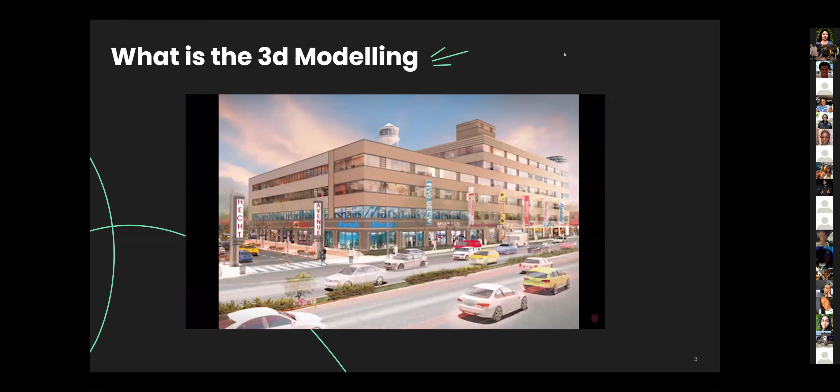My name is James Knoll, and I'm a highway engineer at Dewberry's Mount Laurel office. 3D modeling is a technique in computer graphics for producing three-dimensional representations of objects or surfaces. In recent years, 3D modeling has become widely used in a large variety of industries and mediums. An artist may use special software to develop a three-dimensional representation of scenery or characters for use in illustrations, video games, or movies, while an engineer or architect may use similar software to create 3D models of their projects and design.

Prior to the advent of computers, engineering designs had been drafted by hand. But as technology evolved, computer software became a common engineering tool. Currently, designs and plans are drafted using computer-aided design software, and the visuals created are generally in 2 dimensions. Since the engineering design process is very iterative, whenever a change to the design is made, the visual generally needs to be changed as well.

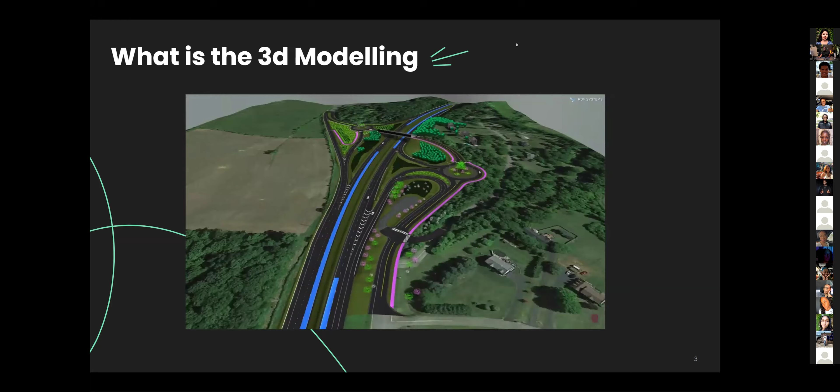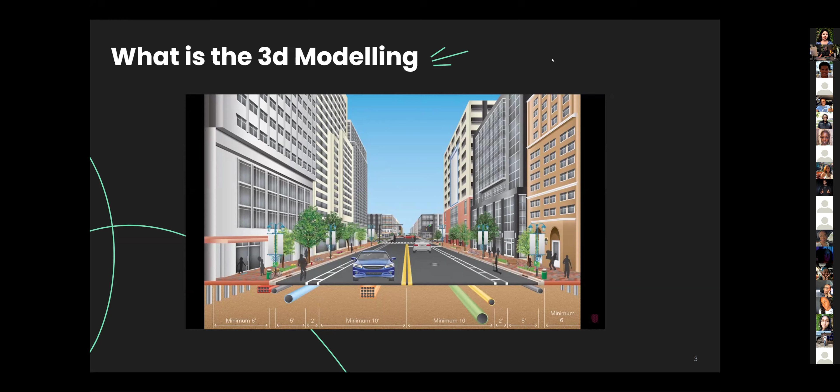By using 3D modeling, it is possible to more easily see how the changes in one area of the design may affect the overall design. For example, a 3D model of a pipe network may reveal that several pipes in the network are colliding with each other, or that the pipes might be colliding with other design elements. For a highway engineer, a model of a roadway may show that raising the profile in one area may cause drainage issues down the road.

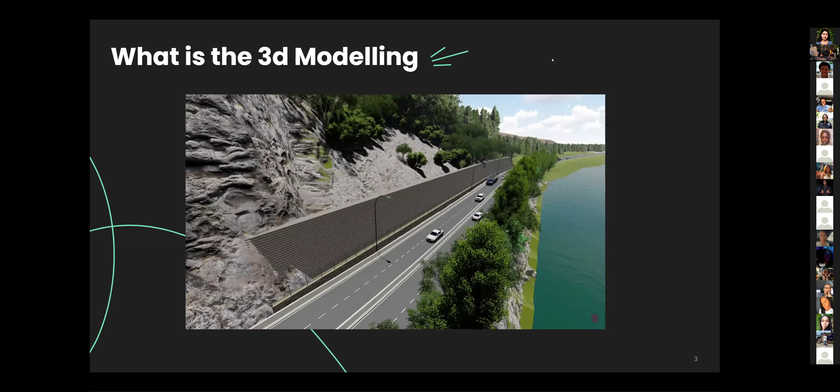While it may be possible to spot many of these issues with a two-dimensional representation, depending on the complexity of the design, it will likely be difficult and time-consuming. But with 3D models, it is easier to locate these issues and determine how to correct them. Overall, 3D modeling allows engineers to develop a better understanding of what their designs will look like once constructed, thus making it an invaluable tool for developing more accurate and constructible designs.

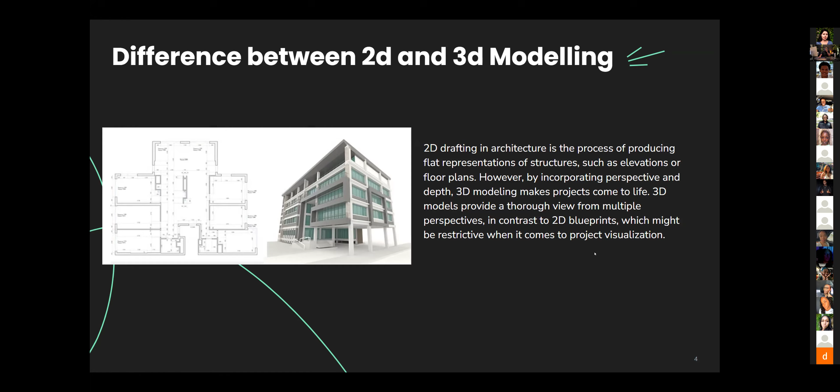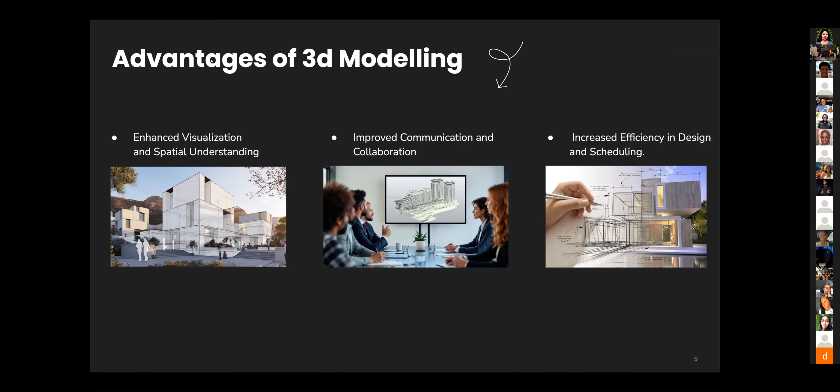So some advantages of 3D modeling include enhanced visualization and spatial understanding, improved communication and collaboration, and increased efficiency in design and scheduling. On the other hand, the disadvantages of 3D modeling include the high initial costs for the software and the powerful hardware. There's a steep learning curve required, so there's significant time and training put into it. It's also a time intensive process for creating detailed models.

The types of 3D modeling techniques include building information modeling, known as BIM, wireframe modeling, primitive modeling, parametric modeling, point cloud modeling, and spline modeling.

Okay, building information modeling, BIM, is a cutting-edge technology that is helpful for architectural visualization in both management and construction. It also makes it feasible to build intelligent models and calculate the quantity of materials required, the building time, and the total cost of the project. This technology aids in iterative design to create more environmentally friendly structures and make efficient use of all available spaces. It occurs in a cloud-based setting and is quite cooperative, allowing construction crews to stay up to date on the latest developments. Some 3D softwares that use BIM are Autodesk Revit, SketchUp, and ArchiCAD.

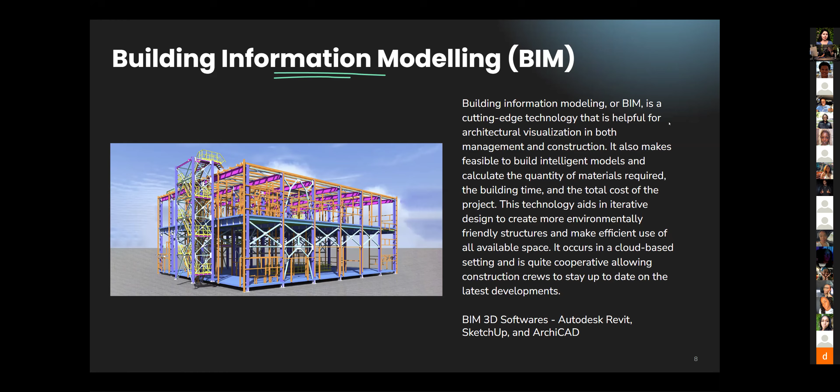So the pros, I would say, for the BIM modeling technique is that there is improved visualization. This provides realistic 3D models that help the stakeholders understand the project better in comparison to the 2D drawings. There's also enhanced collaboration. The centralized model allows architects, engineers, and contractors to communicate with the clients on the same platform, reducing miscommunication. Clash detection identifies design conflicts, for example, pipes running through beams, early, saving costly rework during the construction.

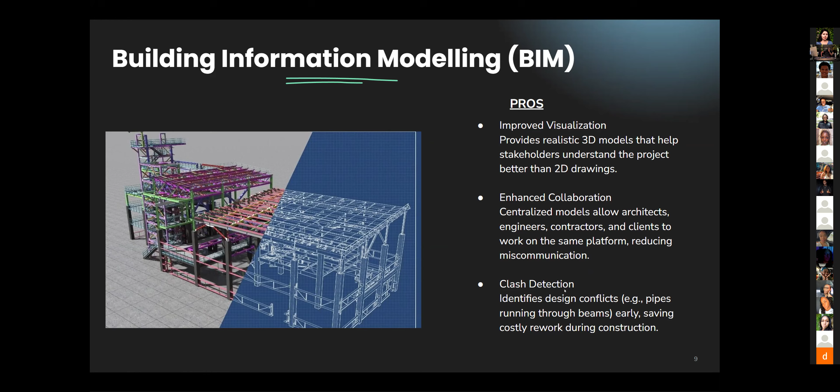The cons include a high initial cost for the software license, the training, and the hardware upgrades. They all can be expensive. There's a steep learning curve. It requires significant training and experience to use effectively. And the standardization problems: different organizations or countries may use different BIM standards, creating somewhat of an interoperability issue. Yeah.

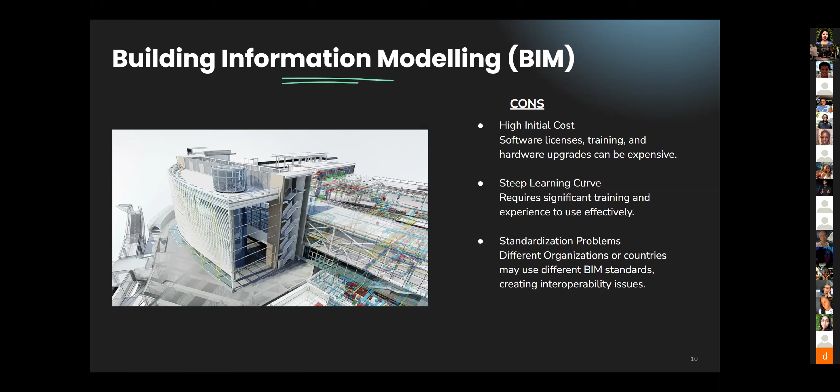Wireframe modeling. Wireframe modeling is also referred to as edge modeling. It entails the creation of a skeletal depiction of an abstract edge of the real-world item. It is a basic and one of the quickest ways of creating 3D visuals. With wireframe modeling, a designer uses lines, circles, and other shapes to build a geometric representation of an object. These lines provide a clear and precise definition of objects' points. This type of modeling might be compared to a preliminary design plan or rough drawing. Wireframe softwares include Miro board used in class, Adobe XD, and Figma.

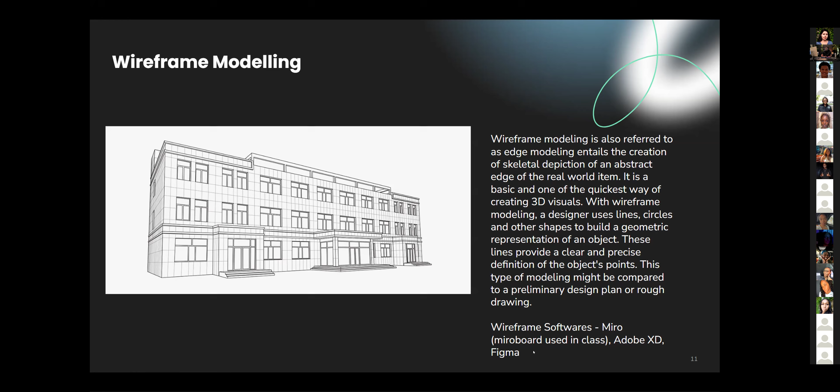Some pros of wireframe modeling include simplicity and speed. Wireframes are lightweight and quick to create, making them ideal for initial concept development. Another pro is low computational load. Because only edges and vertices are shown, the wireframe requires less processing power than surface or solid models. It's a clear visualization. They provide clear understanding of the underlying geometry and proportions of the design.

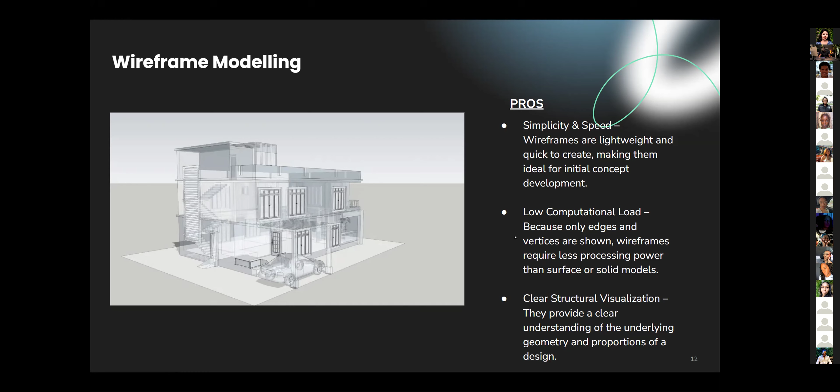The cons of wireframe modeling. Sometimes there's a lack of realism. The wireframes do not represent textures, materials, or lighting, making them less useful for presentation or realistic visualization. Ambiguity in complex models. As you can see on the image, the overlapping lines and edges can make complex wireframes confusing and hard to interpret. No mass or volume information. They don't provide data on weight, density, or material behavior, which limits engineering analysis.

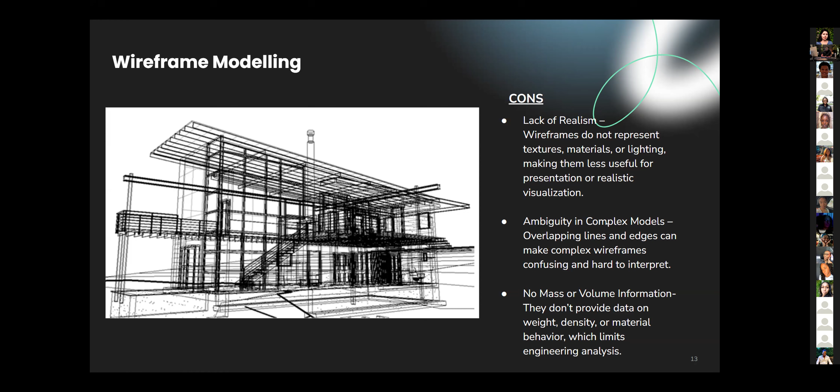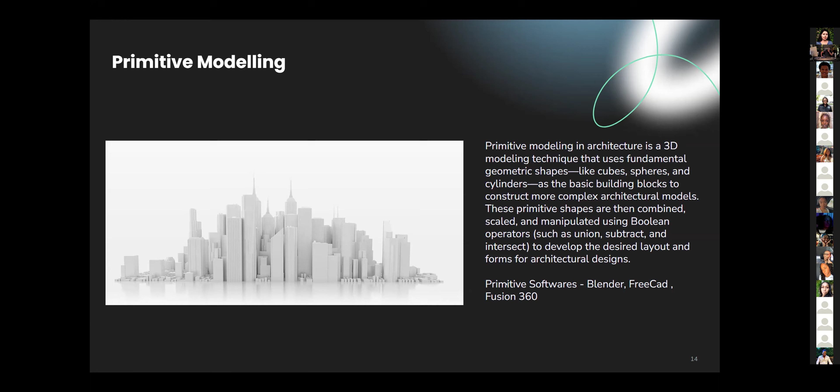Primitive modeling. Primitive modeling in architecture is a 3D modeling technique that uses fundamental geometric shapes like cubes, spheres, and cylinders as the basic building blocks to construct more complex architectural models. These primitive shapes are often combined, scaled, and manipulated by Boolean operators such as union, subtract, and intersect to develop a desired layout and forms for architectural design. Some primitive softwares include Blender, FreeCAD, Fusion 360.

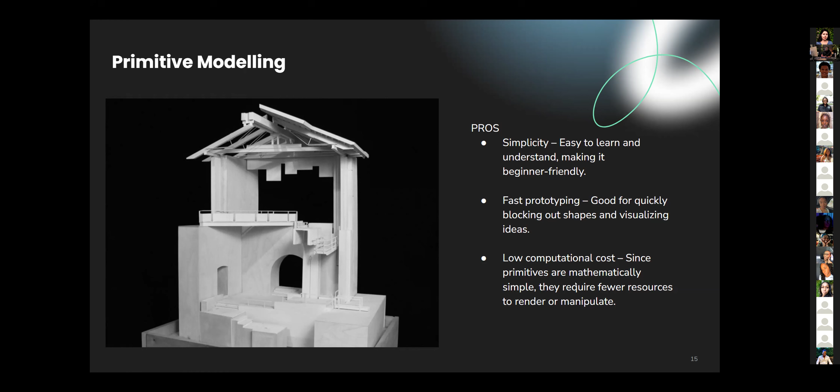The pros of primitive modeling include simplicity. It's easy to learn and understand, making it beginner friendly. It's fast prototyping, good for quickly blocking out shapes and visualizing ideas. It has a low computational cost. Since the primitives are mathematically simple, they require fewer resources to render or manipulate.

Some cons include the limited detail. It cannot capture complex organic or irregular shapes effectively. There can be some unrealistic results, so the models can look a bit blocky or unnatural if not further refined. It's also time consuming for the refinement. To reach realism, primitive models often need to be heavily modified or combined with other techniques.

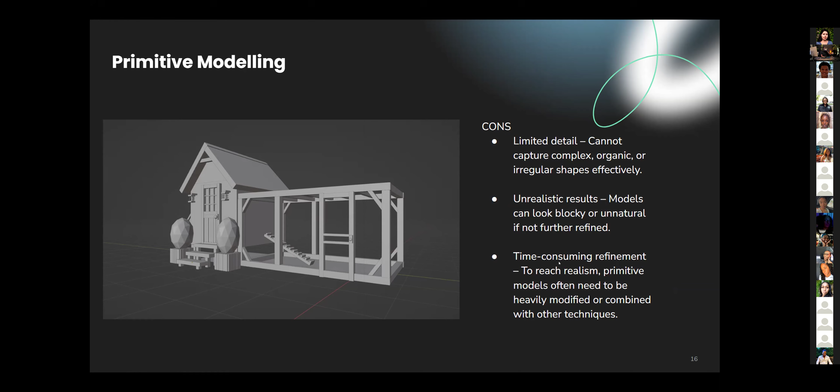Parametric modeling. Parametric 3D modeling enables unrivaled precision when refining a production design. Yet, it is a lengthy procedure. By simply adding a set of parameters, an editing model may be created. Since it demands incredibly precise measurements, it cannot be incorporated in early stages of a project, therefore frequently works well in conjunction with direct modeling. Adding new parameters allows for the creation or modification of objects. Therefore, any modification has potential to impact the overall design. This modeling technique highlights that creative solutions can be created.

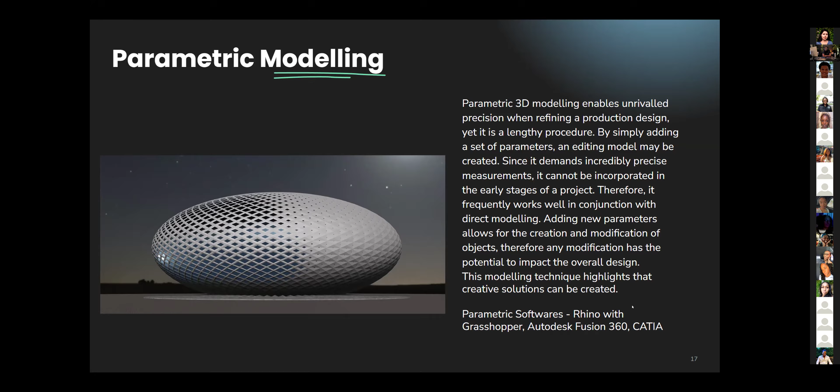Parametric softwares include Rhino with Grasshopper, Autodesk Fusion 360, and CATIA. Yeah. Some pros of parametric modeling include design flexibility and control. Parameters, such as the dimensions, constraints, relationships, can be adjusted at any time, and the model updates automatically, making it easy to explore design variations without starting over.

Efficiency in iteration. It saves time when changes are required, especially in projects with multiple parts or assemblies that depend on each other. Accuracy and consistency. Relationships, for example, if you say this hole stays centered on the face, ensure that the design intent is preserved even when the dimensions change.

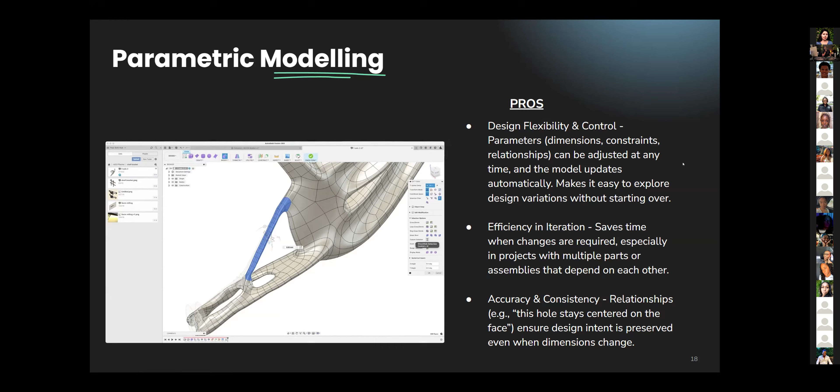Some cons include the steep learning curve. Parametric modeling requires strong knowledge of parameters, constraints, and software tools, which can be intimidating for beginners. And there's also high computational demand. Complex parametric models can become heavy, slowing down processing and requiring powerful hardware. Over-constraint or model breakage. Poorly planned parameter relationships can cause errors or make the model unstable when the dimensions change.

All right, guys, keep it going. Okay, you have like 5 minutes in your time.

Point cloud modeling. Point cloud modeling, occasionally referred to as scan to BIM, is a 3D computer graphics and modeling technique in which a sizable collection of points in three-dimensional space is utilized to depict the environment or structure. Usually, a variety of scanning technologies like photogrammetry or LiDAR, light detection and ranging, are used to record these points. In point cloud modeling, every point in the data set has information about where it is in 3 dimensions, along with maybe other characteristics like color or intensity. A thorough and precise 3D representation of the scanned object or environment can be constructed by processing and evaluating these points. Softwares that use point cloud are Undet, CloudCompare, and MeshLab.

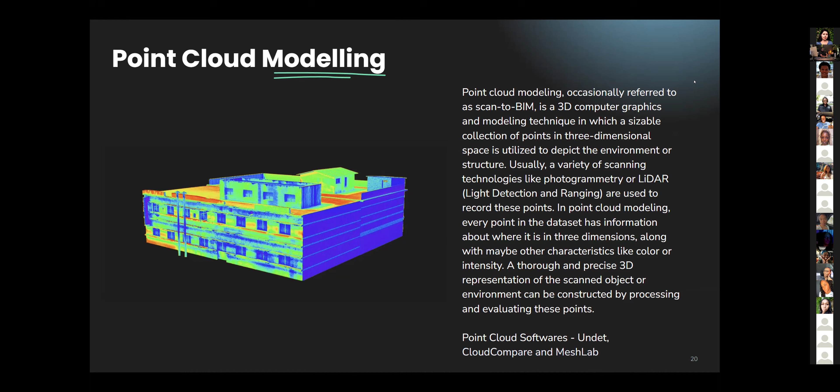Okay, so the pros of point cloud modeling are high accuracy and detail. It captures exact dimensions and shapes of real-world objects, even with complex geometries. Laser scanning or photogrammetry ensures millimeter-level precision. Speed in data collection. Scanning a site or object is much faster than manual measurement or traditional survey methods. Comprehensive documentation. It provides a complete digital record of existing conditions useful for restoration, renovation, and maintenance.

Cons of point cloud modeling are a large data size and processing needs. Point cloud files are massive, requiring high computing power, storage, and specialized software. Processing into usable 3D or BIM models can be time intensive.

High cost on equipment and software. Laser scanners, drones, and photogrammetry tools are expensive. Professional software licenses add to project cost. Complexity of data handling: it requires skilled personnel to clean, register, and interpret point clouds. Raw scans often include noise and need refinement.

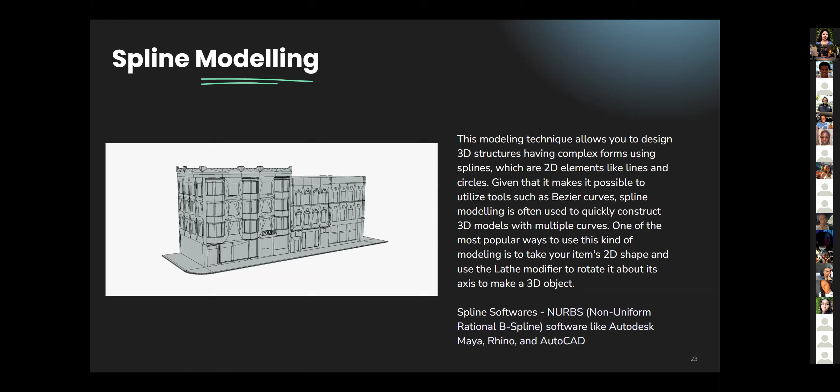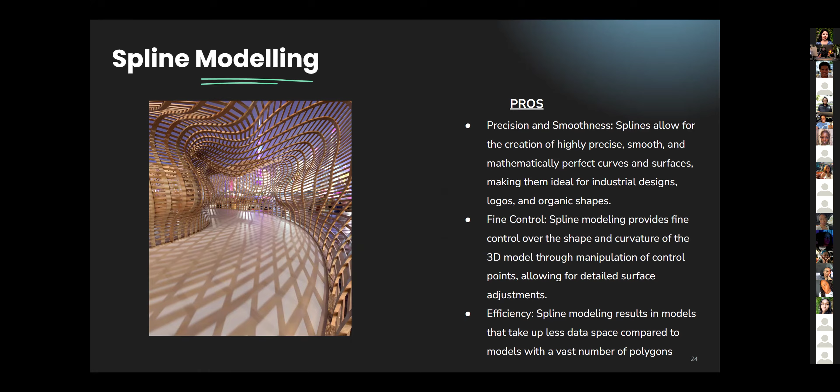So some pros are precision and smoothness. Splines allow for the creation of highly precise, smooth, and mathematically perfect curves and surfaces, making them ideal for industrial designs, logos, and organic shapes. Fine control: this modeling provides fine control over the shape and curvature of the 3D model through manipulation of control points, allowing for detailed surface adjustments. Efficiency: this modeling results in models that take up less data space compared to models with a vast number of polygons.

Okay, and some cons are complexity for detailing. It can be challenging to edit and detail individual parts of spline-based models as its structure is more continuous. Limitations with engines: game engines and other applications are often better adapted to polygonal models, which can pose compatibility challenges for spline-based designs. High base mesh weight: while splines offer fine control, they can result in higher base weight for the mesh, impacting performance in some contexts.

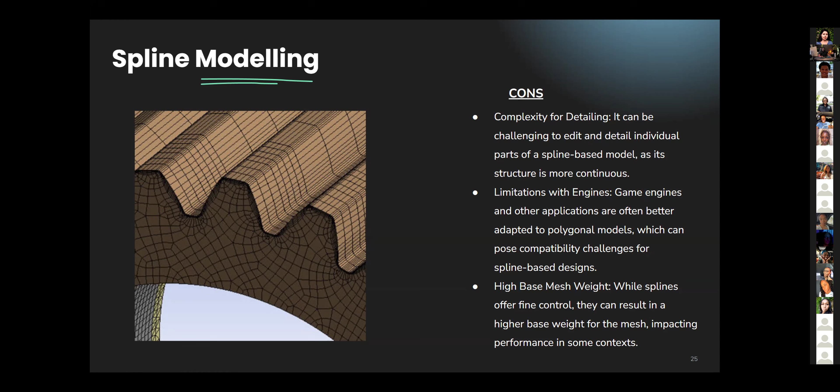So, 3D modeling techniques in architecture. In architecture, 3D modeling techniques are methods used to digitally represent buildings, landscapes, and structural elements in three dimensions. These techniques help architects and designers visualize, analyze, and communicate their ideas before actual construction. The choice of technique depends on the project's requirements, the software being used, and the level of detail needed.

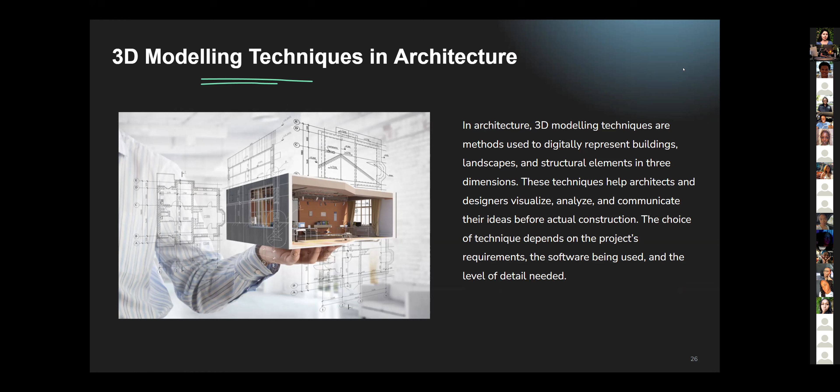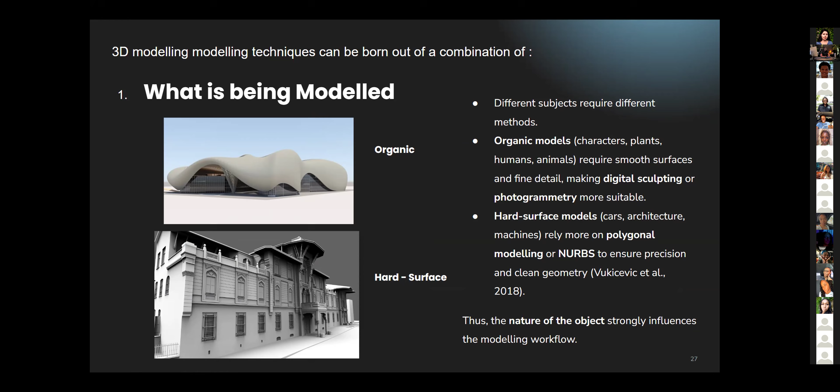Okay, so essentially, just to wrap this up, this explains the different types of modeling techniques. So you have organic and hard surface, and this shows why different subjects require different methods. You can skim through. Okay, next. So it also is dependent on the 3D software or tool being used. Each software has its strengths that shape techniques.

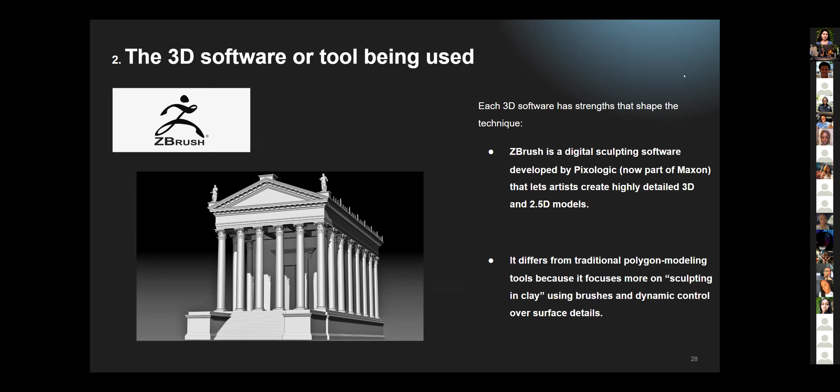This is an example of ZBrush. It's a digital sculpting software, and it differs from traditional polygonal modeling tools because it focuses more on sculpting in clay using brushes and dynamic control over surface details. Similarly with Rhino, it has conceptual design, refinement, parametric design, and exports for production. These are different things that you consider.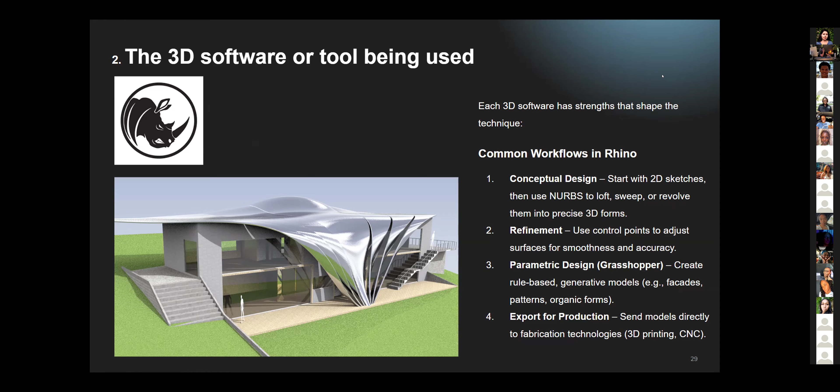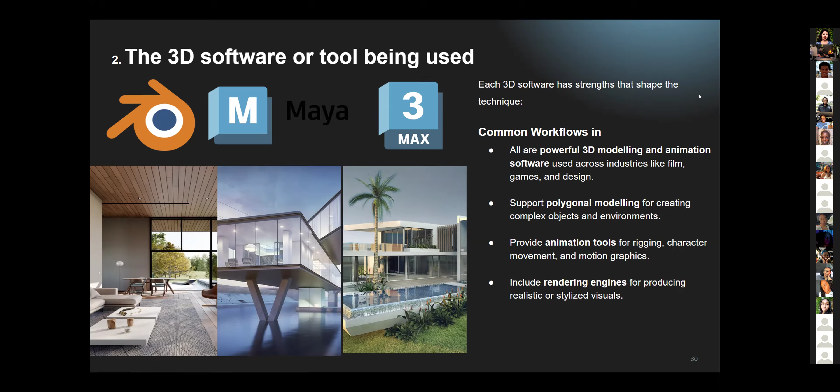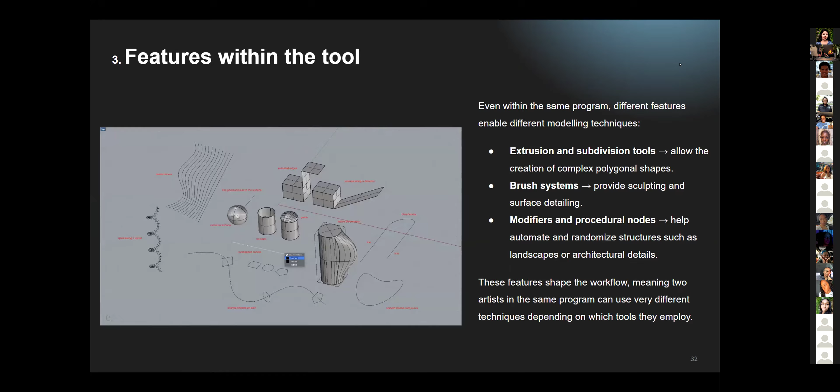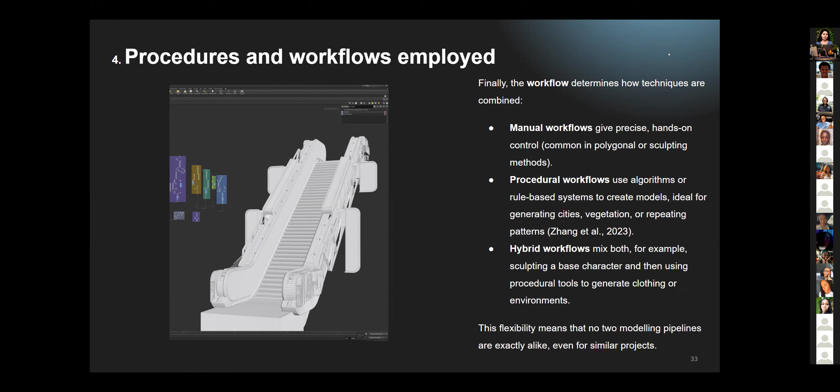And finally, the workflow determines how techniques are combined. You have manual workflows, which give precise hands-on control; procedural workflows that use algorithms or rule-based systems to create models, generating cities, etc.; and hybrid workflows that mix both, for example, sculpting a base character, then using procedural tools to generate clothing or environments. The flexibility means that no two models... oh, thank you.

All right, topic one. Thank you. I'm going to save my comments. So after you present, I will comment, and then you ask the question, and then the other group members can ask questions. Okay, good, you have references. There are some things that I might have to update or correct in the presentation before you ask the questions, right? All right. So that's topic one, which was: what are the types of 3D modeling techniques and their applications in architecture?

Topic two, advantages and disadvantages of real-time versus offline rendering. Sir, it's two now. Yeah, two now. Alright, presenting first, and then we're asking. All right? 15 to 20 minutes. All right?

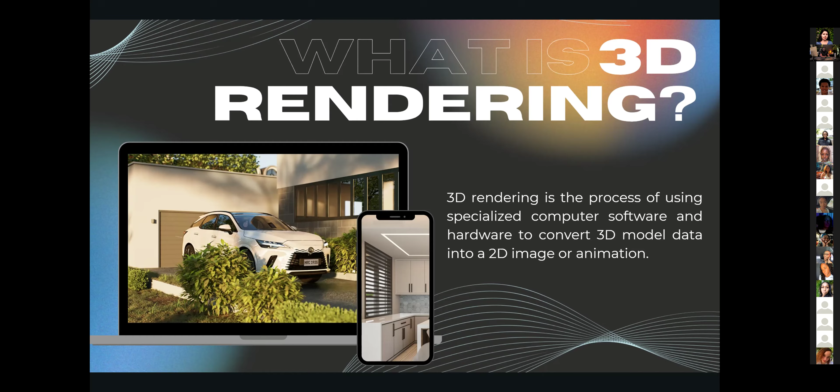Okay, the big question, what is 3D rendering? So 3D rendering is the process of using specialized computer software and hardware to convert 3D model data into a 2D image or animation. So basically, just think of it like taking a digital model and giving it a realistic look. It's almost like taking a picture of something that doesn't exist yet. And I think all of us are quite familiar with all of that.

So one of the coolest parts about this is that you spot mistakes before construction. It's basically a cheaper way to fix something in rendering than when the building is halfway done. And since architects often work with engineers, interior designers and landscapers, renders help everyone to get on the same page visually.

So as it relates to architectural firms now, most architectural firms use both real-time and offline rendering softwares based on the different scenarios. Firms use real-time rendering for quick changes for client previews and offline rendering for the final output or marketing. So just by that alone, you kind of have an idea of where the softwares, both real-time and offline, work, or what we would expect then.

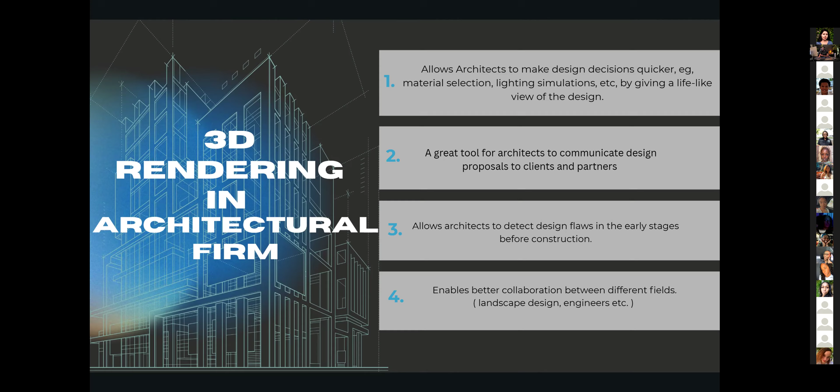So for this, we could say that it's not just about making pretty images, it actually impacts design decisions, like which materials to choose or how natural lighting enters a space. I feel like clients are more likely to approve projects when they can actually see what they're investing in and it feels more real to them. So this is why 3D rendering is actually important.

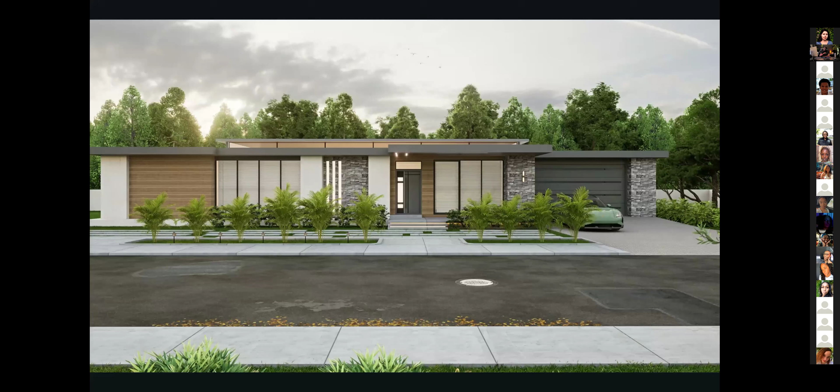Okay, so I will be presenting on what is real-time rendering. Real-time rendering focuses on rendering images or animations in near instantaneous time, allowing for interactive manipulation of the scene. This approach is commonly employed in video games and interactive applications. So what this means is that as you are moving through the scene, it is rendering in real time: environments change in real time, lighting changes in real time as you move through the scene. This is an example of real-time renders.

Okay, so real-time rendering scenarios. We would use real-time rendering for quick turnaround for client previews or studio desk crits, for walkthroughs and virtual reality, and for quicker render times at the cost of realism.

Advantages of real-time rendering. Real-time rendering offers high realism, produces the highest quality results, accurate lighting, shadows, reflections, and material properties, handles complex scenes better, large geometry and heavy materials, as well as complex simulations, for example, water.

Examples, water caustics, right? Mostly using films. Oh, that's actually offline rendering. All right. Okay, so mostly using films for final visualizations. Software is flexible and allows for CUDA processing, both GPU and CPU, as well as CPU rendering. Performs better in interior close-up renders that require high quality details. Okay, so that was supposed to be for offline rendering.

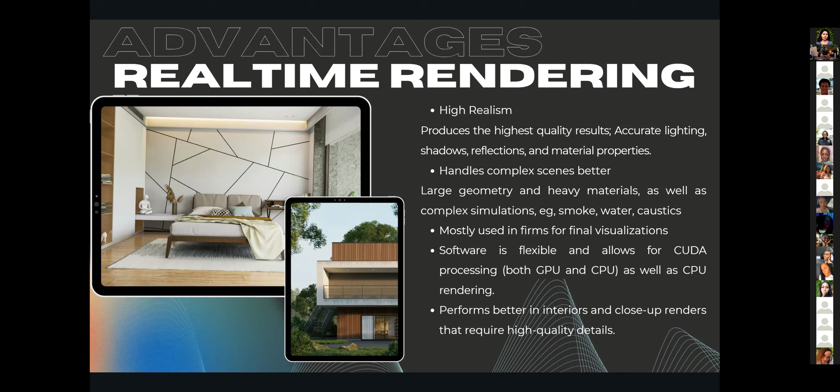Okay, so competitors in real-time softwares include Chaos Enscape, D5 Render, Unreal Engine, Lumion, Chaos Vantage, Autodesk Arnold, Twinmotion, and Unity. Here are some examples of the different renders in different rendering softwares: Enscape, Twinmotion, Lumion, Unreal Engine, etc.

What is offline rendering? Offline rendering refers to the traditional method of generating images or animations by computing every pixel in a scene before displaying the final result. This method involves pre-rendering frames or images using powerful computers and can take minutes or even hours per frame to calculate complex lighting, shadows, reflections, and textures.

So offline rendering is basically the process of creating high quality, realistic images or animations from 3D models by calculating lighting, shadows, and materials without needing to display results instantly in real time. So this is an example of offline rendering.

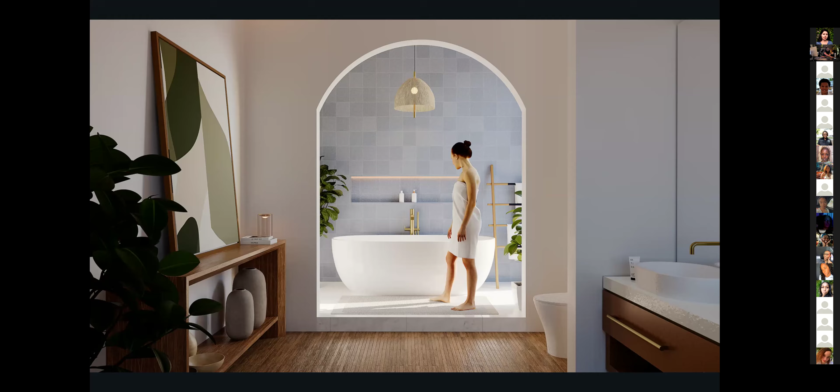So scenarios in which offline rendering is used. One, ultra realistic renders for marketing or ads. Two, high budget projects where quality is more important than speed. Three, high detail rendering, so close-up shots that require high material detail and advanced lighting. So competitors of offline softwares include 3ds Max, Chaos Corona, Maxwell, Blender, Arnold, and V-Ray.

So this is an example of a render done in V-Ray. It's an industry standard renderer in architecture, film, product design, and advertising. Offers both CPU and GPU rendering. It's known for speed, flexibility, and large material library. It balances realism and performance. Widely used by professionals.

So this is Chaos Corona, and this is an image with rendering done in the software. It's a high quality photorealistic rendering engine known for simplicity and ease of use, especially in architectural visualization. It offers interactive rendering and realistic lighting, material handling. It's a fast learning curve compared to V-Ray or Arnold. This is Blender. It's a free, open source 3D creation suite. It includes built-in Cycles and Eevee render engines.

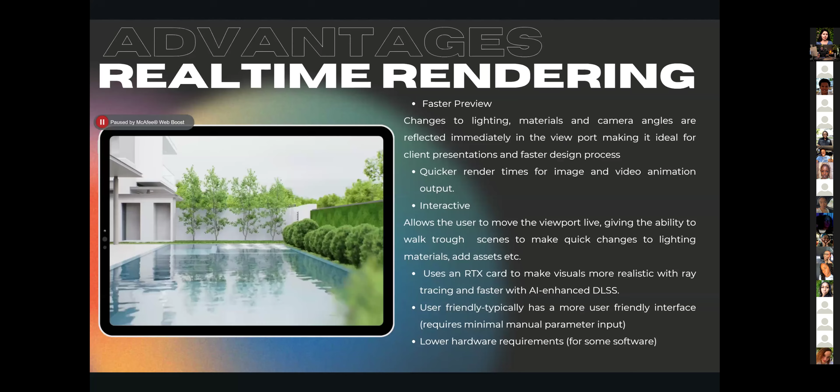User-friendly: typically has a more user-friendly interface, requires minimal manual parameter input, lower hardware requirements for some software. So as it said, the real time allows you to move through the scene in real time and put in any assets or any materials that's needed in the scene, after which you can generate quick views in the software.

Disadvantages, however: limited realism. Offline rendering performs better at producing realistic results, better lighting, caustics, global illumination and reflection. Hardware demanding. Requires a powerful GPU with a high RAM to handle complex scenes and higher resolution PBR textures and HDRIs. Less control for advanced effects such as advanced reflections, caustics, and global illumination.

So as we said before, the specs or specifications, if your computer is not at a certain level, you can't really use real-time rendering softwares because it demands so much of the PC, and that's the setback with it. I think for offline, you have the scene and it just renders the scene for you. It might take some time, but you don't have to go through the model and put in any assets or anything of that nature.

Advantage of offline rendering. High realism produces the highest quality results, accurate lighting, shadows, reflections, and material properties. Handles complex scenes better, large geometry, and heavy materials, as well as complex simulations. For example, smoke, water, caustics. Mostly used in firms for final visualization, software is flexible and allows for CUDA processing, both GPU and CPU, as well as CPU rendering. Performs better in interiors and close-up renders that require high quality details.

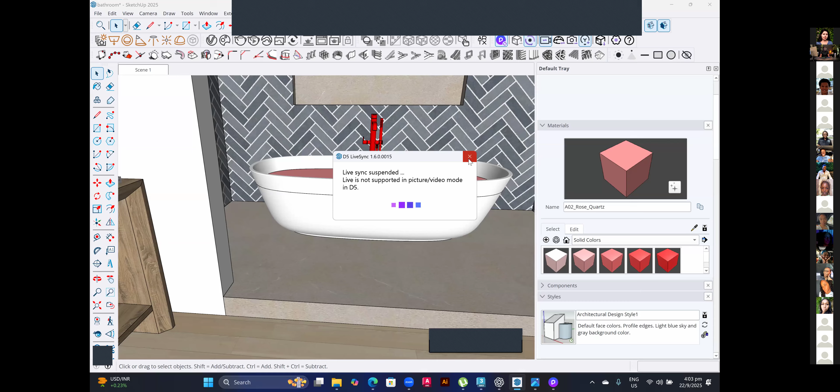Hello? All right. So this is a quick demonstration between real-time and offline rendering. So first I'll show a demonstration in our real-time software, which is D5. As you can see, the interface for D5 is more interactive, meaning you can manually move around the scene and you're still getting a rendered image.

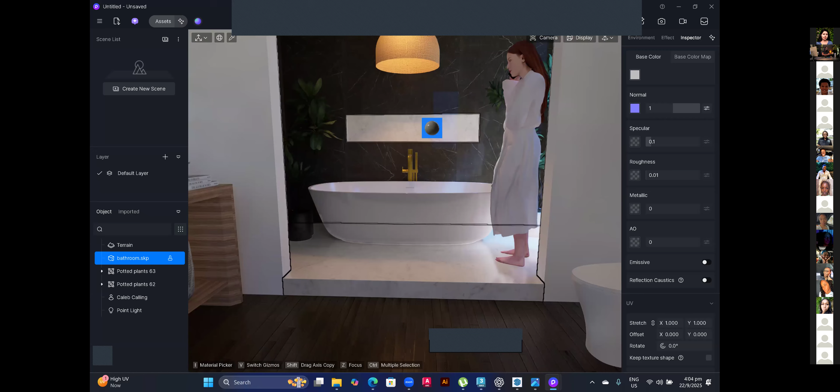And the materiality, you can change the materials of various surfaces quicker by simply adding it to the surface and it changes it instantly. And the similar scene inside 3ds Max, which uses Corona for rendering. And for this software, it's more complicated in terms of materiality, being that you have to manually move this.

Oh, the zoom bar. There should be a hide button there. Usually, no, it's the green. There's a little green tab below. You see that little green, like a little.

Oh, all right. Yeah. So with this software, you have to basically set up the materials manually inside a material editor, and it's similar to the other offline renderers such as V-Ray and Arnold, where you have to manually attach the material images to this central material object that the rendering software interprets as the materials, so stuff like the base bump and the base color, displacement, all that stuff.

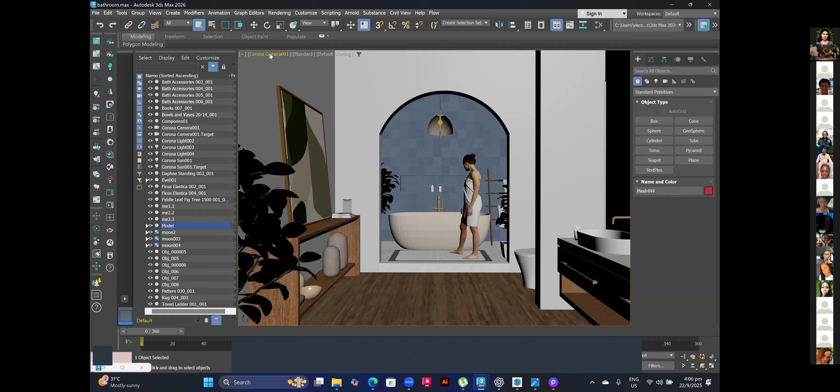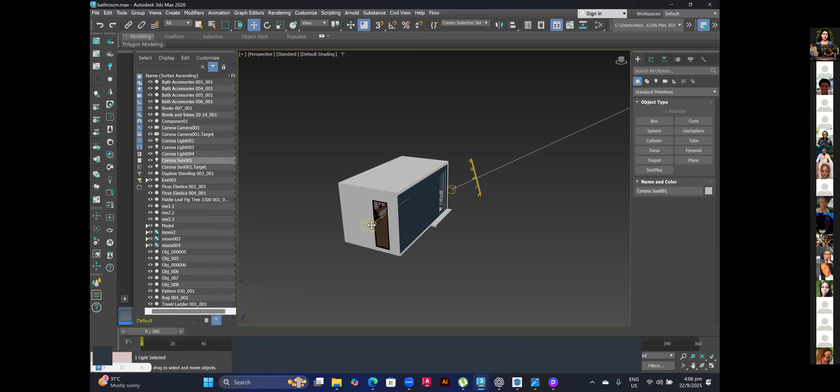And then you would basically have to set up the lighting and the camera and all that stuff manually before you can render the image and get the final result. So this right here is actually the sunlight that you would have to set up manually. You have to change the angle and all that stuff. And this will be the camera right here. So you have to change the field of view and all that stuff. And then the final result would look something like this.

Are we attempting to render while screen sharing? You can. Hopefully the computer will survive. It's surviving. That's good.

Yeah, so this is the interactive render. So this is how it processes. It processes the image, where it uses the pixels and it bounces the light around the scene, and that's called passes, where the software repeatedly simulates the light movement and the physics, and replicates it until it gets it correct, essentially.

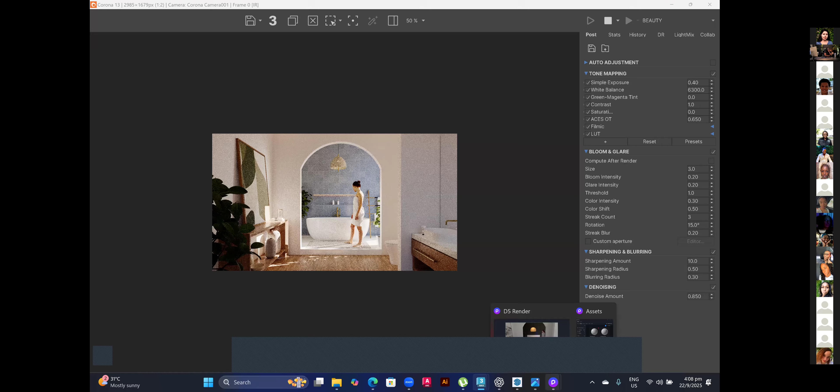So that's the reason why rendering in an offline rendering engine takes so long, because it uses a different approach to rendering as opposed to the real-time rendering engine that basically captures the scene as is and just optimizes the image until it reaches a desirable output. Yeah, that's it, essentially. All right, good stuff. Good stuff.

All right. Yeah, you guys were approaching the red zone in terms of timing, but good information. All right. So each group is going to pose a question, right? So there are two presentations that just went by. There are 8 groups that are in the audience now. So 4 questions should go to topic 1 and 4 questions should go to topic 2. All right, guys?

All right. But before you ask your questions, and by the way, I'm going to give you guys limited time, because time is going. So before you go into the questions, I'm going to comment first. So firstly, on the first presentation, good information. I noticed that you kind of showed all your information pretty much on the slides. So it's good that you had all the information.

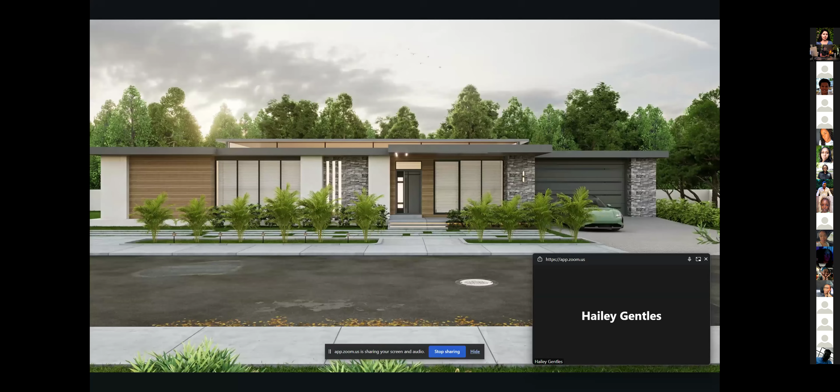okay, but these cars look the same way. Like in the example at the end, I could see where one looked different than the other. But it's really just lighting. Like the one on the right is more realistic in a way, versus the one on the left. In reality, a car isn't as shiny, if you get what I'm saying. Even with how the light from the headlights would look or appear. Right.

It's just lighting. Right. So of course now to the untrained eye, and when I say untrained eye, I'm not even talking about the man on the road. I'm even talking about first year architecture students, people in the industry. They would say, okay, these two things look the same. So I want you guys to think about a different word. The race now is not the race for realism because everything looks real. It is accuracy. Because I like how you mentioned the word lighting.

And the reason why I put the word accuracy there is because accuracy in architectural viz is not as sought after as with Hollywood, right? In architecture, you want it to look nice. I want to use the word nice. You know, real doesn't always look nice. We want people to be excited about this building, this design. And when you render it photorealistic and it has that real look, it looks nice, even though it might look computer generated or not as real as this other image. It's still within the realm of good visual eye candy.

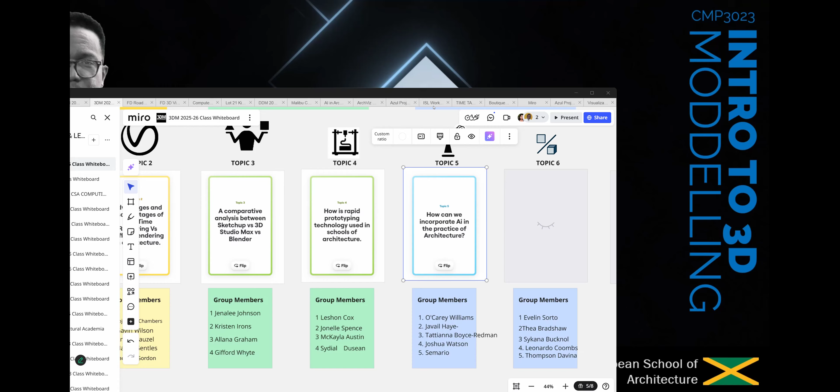Excuse me, sir, are you sharing your screen? Oh, my bad. I forgot I stopped sharing earlier. Here we go. Right. So topic 5 is how can we incorporate AI in the practice of architecture, right? And let's give it a while to open this thing. Topic 5. Here we go. Right.

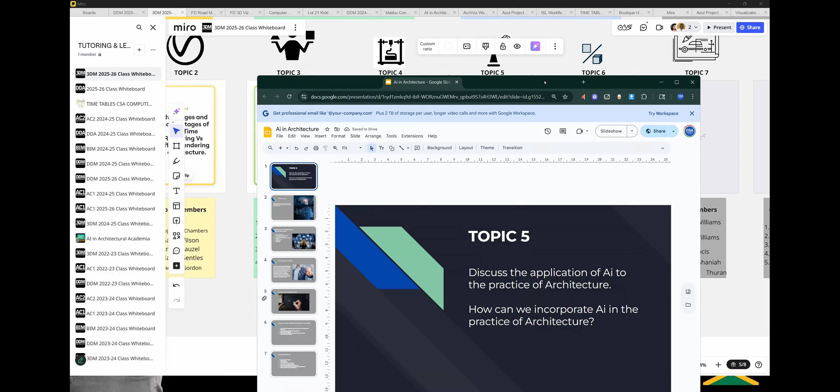So you guys are going to discuss the application of AI in the practice of architecture. How can we incorporate AI in the practice of architecture, right? So, of course, this topic can take you down a rabbit hole, guys. So you're gonna have to try to not slide down the rabbit hole, right? I want you to stick to architecture. We know that AI is a simulation of human intelligence. That's basically what it is.

And we know that there are all sorts of facets of AI, anywhere from auto face detection, social media algorithms. It's in everything. And it is just under crazy development now. So what I want you guys to do, I think there's this misconception now about AI in architecture. I want you to stick to looking at how people can use AI. Like this is a great channel, you guys are supposed to know it. I think it's 30X40 or so its name.

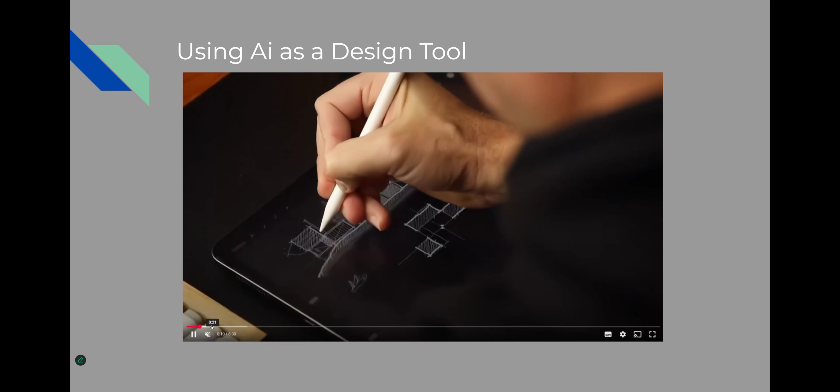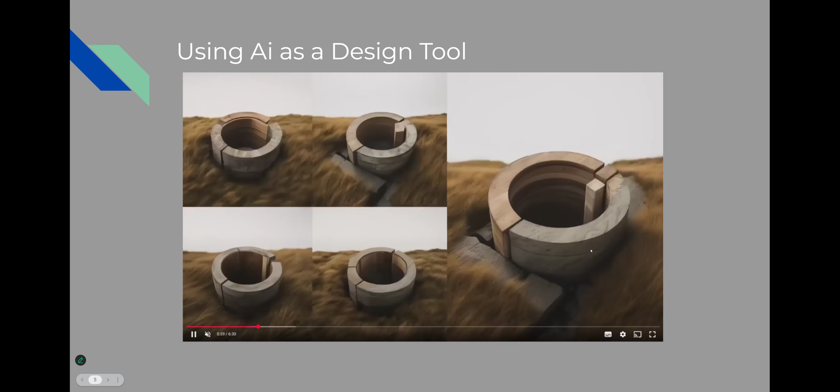And this guy shows an example of how he uses AI, particularly in architecture and design, where he plugs some of his images into an AI program and then uses it to generate, even if it's not exactly logical, inspirational images that will help set the tone for what he's trying to create, right? So there are different ways, so I want you guys to stick within the realm of architecture. And I don't want you to stick within the too technical realm.

Like, for example, yes, we can use AI to work out how many bedrooms can fit in this space and all of that technical stuff. But I want you to also think about it as it relates to design as well, right? What are some of the applications of AI and how can it be used in architecture? Of course, what are the pros and cons of using AI? And of course, what is AI itself? As I say, guys, don't slide down the rabbit hole. You only have 15 minutes, right?

Are there any plugins that can be used, not just plugins, but how can it be used in conjunction with the programs that we use today, right? And give us some examples of AI work in architecture, right?

Yes, we probably want to look at the history of AI, but as I said, don't go too deep because AI is very broad. I would very briefly summarize the history of AI and stick more to how it has been used in the design area. I would stick to the design field.

Don't go too deep into how it works, because you can get lost in a deep web of how it works, right? But I want you to bring it home and tell me some of the different tools that we can use. And talk a little bit about the ethical use of it, right? It would be great if you can have any kind of demonstration.

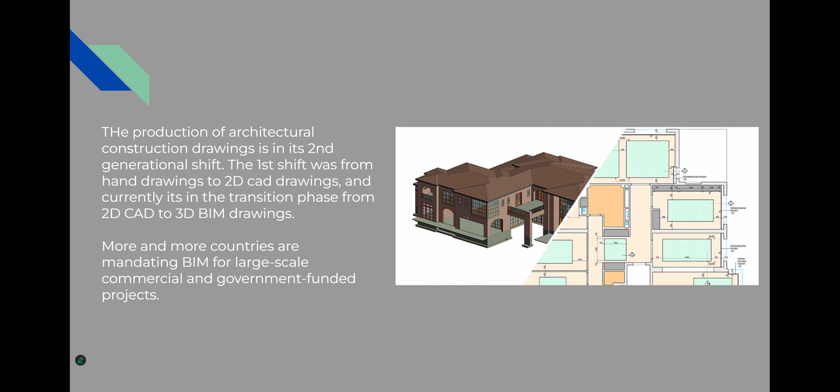So, here we go. For your topic, you're going to discuss the use of 2D drafting versus 3D BIM for construction drawing production. Traditionally, 2D drawings were how we did things. We started from hand drawings, which were also 2D, but then we went to the computer. We still do drafting nowadays, right? We're still learning how to transition to BIM. But during this transition, things can be tricky, right?

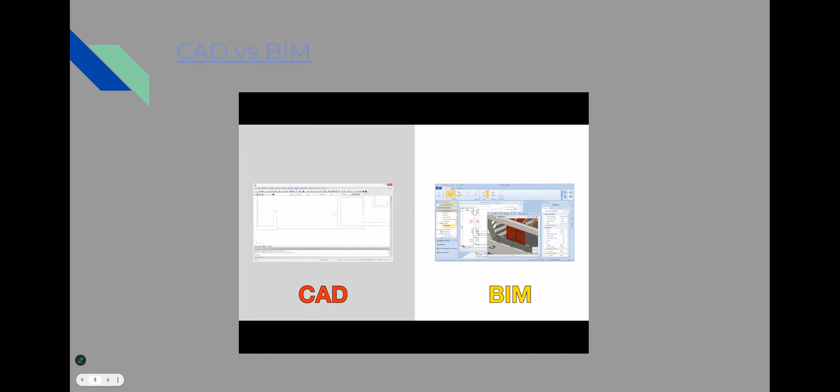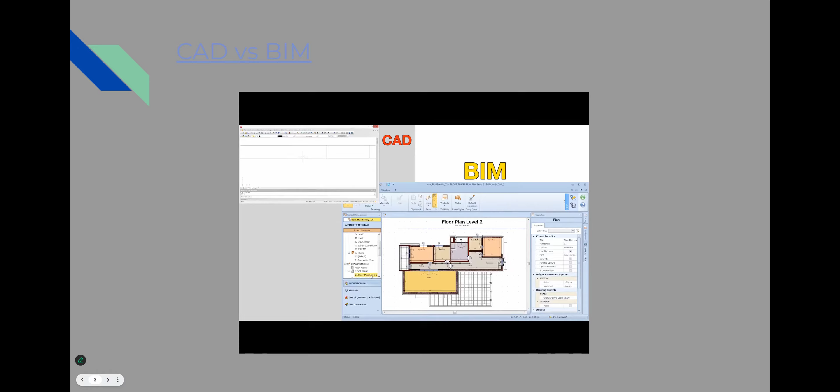So I want you guys to compare these two methods. In one of them, you're drawing lines, you're offsetting, using tools like fillet, trim, all that stuff. And the other one is all about parameters: wall height, wall type, what level this wall is on, and all of that. So we're going to compare them.

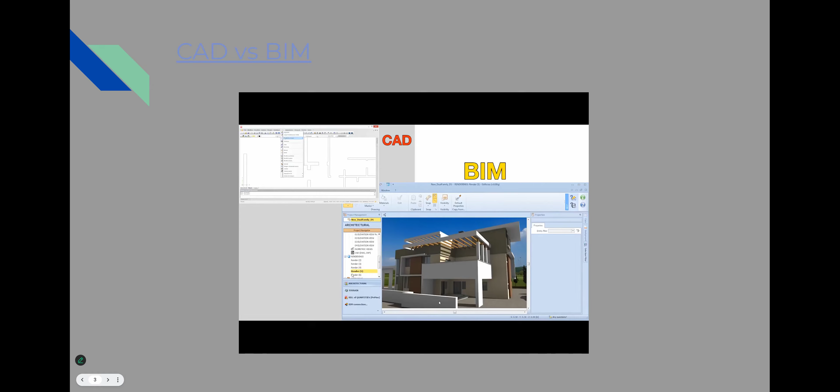And we want to look at the disadvantages and the impact on the industry. What is happening in the industry nowadays when switching from 2D to 3D? I'm sure you can even find firms nowadays that are in the process of switching. What are some of the challenges they're going through? You guys are actually in school in the middle of this transition.

Most of you are going to come out of school knowing BIM, but you're going to go into a firm and they're going to be using CAD. They're going to be using 2D. So how do you think that integration process can work? For people who are using CAD, what are the types of 2D CAD software?

When I say CAD, I don't mean AutoCAD, I mean computer-aided design. What are some types of 2D computer-aided design software, and what are some types of BIM software? I want you to tell me those different types. And how does each of 2D CAD and BIM add to or subtract from the efficiency of doing construction drawings? Because I'm sure there are pluses and minuses to each, right?

And I want you to talk about how the industry has shifted. Speak a little bit about the transition from 2D CAD to 3D, and the main things that separate them. What is the core thing that separates 2D drafting from BIM? I want you to nail that on the head, because some of us use BIM, some of us use Revit, but we also use CAD. Sometimes we combine them together. So what is the main thing that separates them?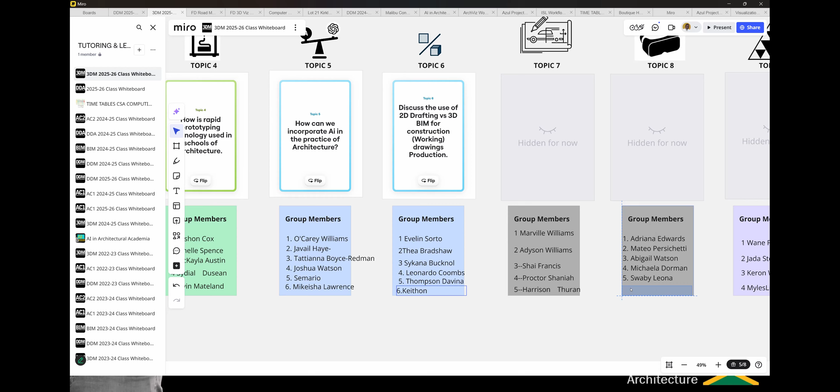All right, I think that's it for general questions. I'm going to stop the class and then do the meeting so that the meeting doesn't come into the class. Sir, I have a quick question. Go ahead. I wasn't able to select our group. Is it possible for you to add me? Yeah, you need to be in your group for sure to get your group grade. So, Mikeisha Lawrence. I'm going to drop you in your group. All right, cool. Who else wasn't in a group again? You had sent me a message, no? 2 persons, sir. Keithon and Shane McCoy. Right. All right, cool. Any more questions? Nope. All right, let me stop this thing now.